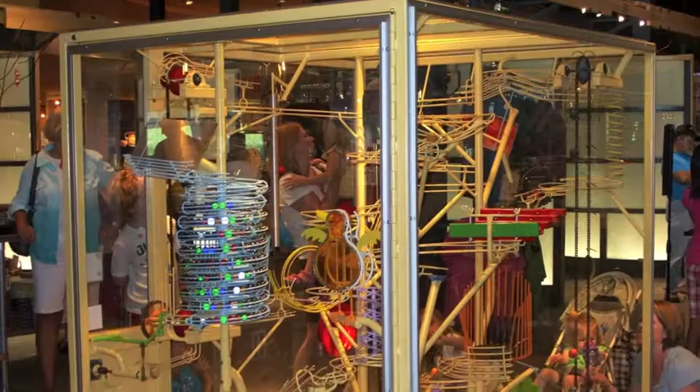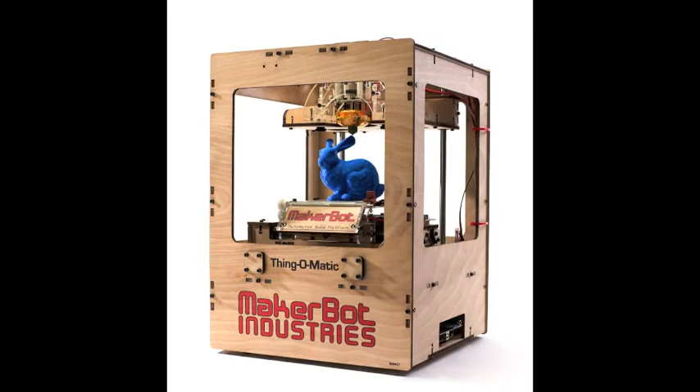I set out to design a kinetic sculpture, like the one seen here in the Corning Museum of Glass in upstate New York. I've always been mesmerized by these machines, and thought to myself, wouldn't it be cool to have one that could be 3D printed using a MakerBot Thing-O-Matic 3D printer?

This open source platform uses fused deposition modeling to lay down successive layers of ABS, a common thermoplastic used in everything from cell phone cases to Legos. The device builds up the desired part cross-section by cross-section, shown here in high speed.

While increased size increases the print time significantly, increased complexity, particularly in voids and holes, does not, and instead allows for less material to be expended, as 3D printing is an additive process as opposed to a subtractive manufacturing process that could employ the use of a CNC mill or lathe.

Through careful design and planning, I brought the idea to reality over the course of a few weeks using the computer-aided design and manufacturing tools at my disposal.

Starting first with concept sketches, I progressed to computer simulations using SolidWorks, a 3D modeling and analysis software package which I used to perform both motion analysis studies and finite element models to confirm my designs. I finally built a full working prototype with the Thing-O-Matic 3D printer detailed earlier.

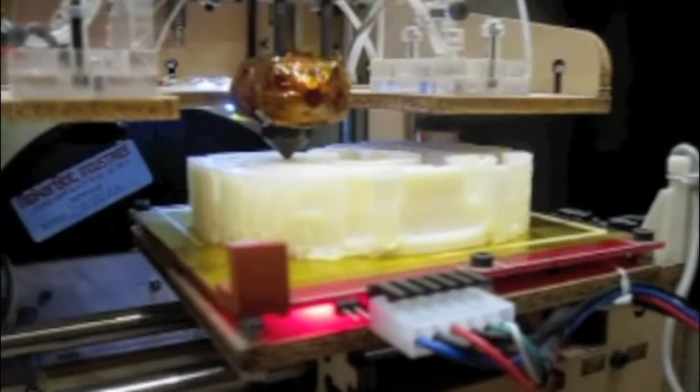I'll quickly go through some of the more interesting parts of the development of the machine, show some time-lapse photos of the 3D printing process, and then get to a demonstration of the device at the end.

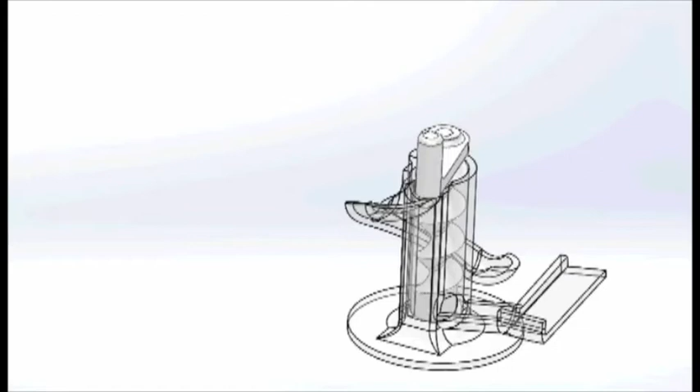One of the most useful tools in the development of this device was the motion analysis studies provided by SolidWorks. This study shows a flaw with my initial design, in which the ball would never escape from the helical lift.

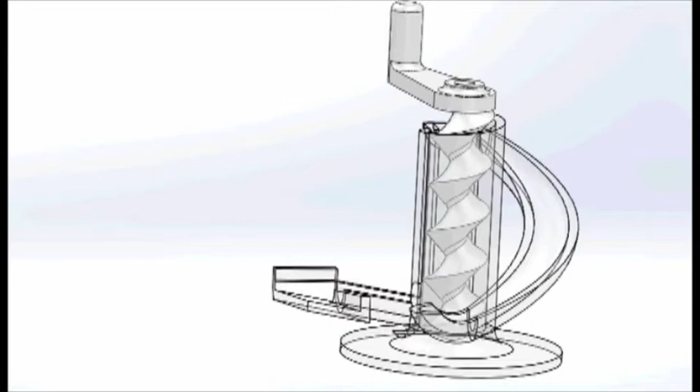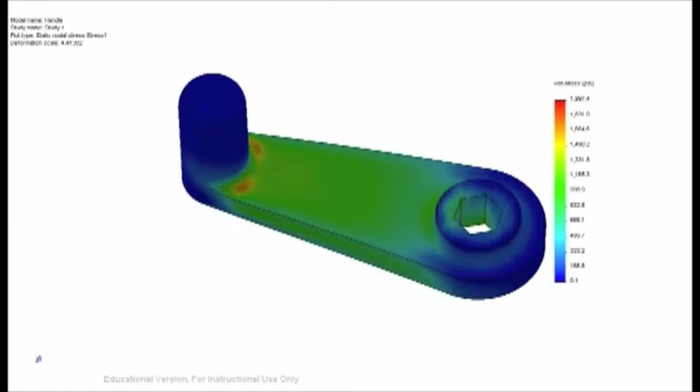These studies confirm that, in combination, the use of ABS and the geometry I specified would give a rigid design for the handle that would not yield during operation or moderate unnatural loading.

After the design was finished, it was time to print. This sequence of images illustrates the helical lift being 3D printed.

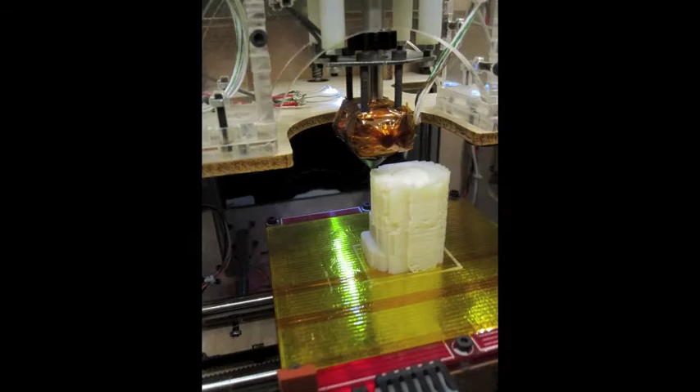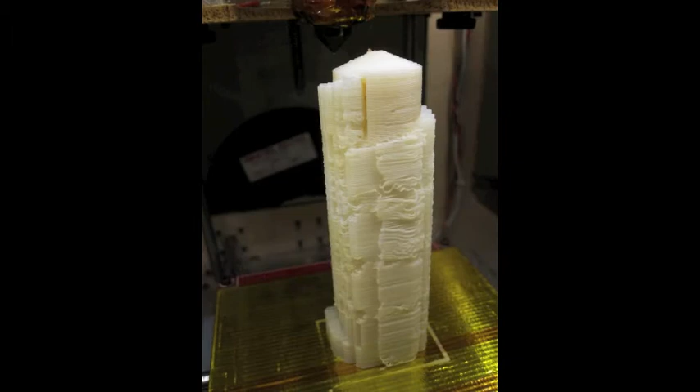After a print time of approximately 2 hours and 15 minutes, the support material needed to be removed. The part then emerged.

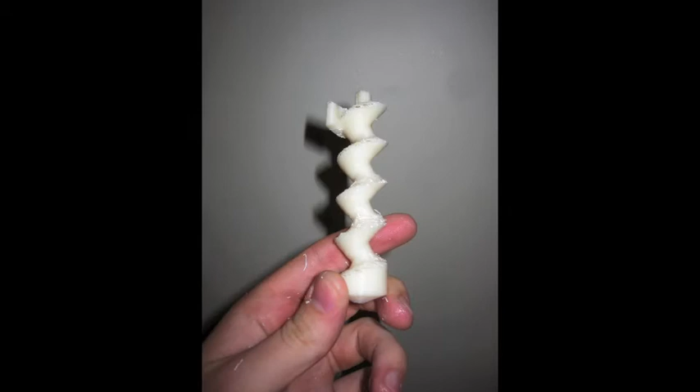Now, onto the base and track.

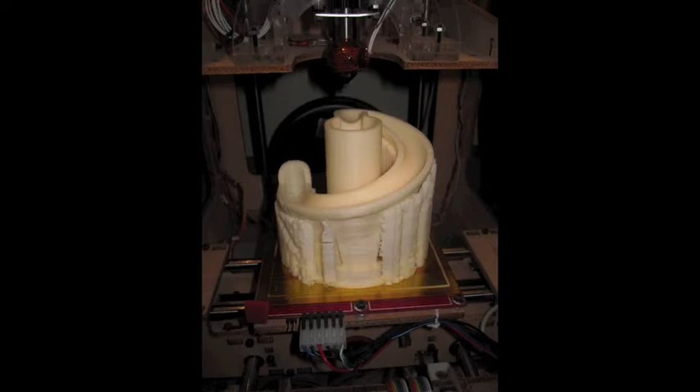Here, you can see the final result from the printing process, including the support material. This print, along with the handle that is not shown, took over 16 hours to complete.

Now, the final product. Here is the device fully assembled. Let's make it move.

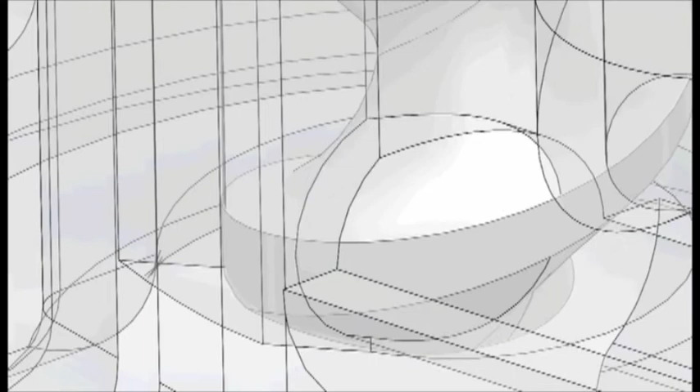Seen at the bottom, this feeder track aligns the ball bearings for insertion into the lift. Gravity pulls the ball bearings into the cutout, and a few turns of the hand crank brings the ball to the top.

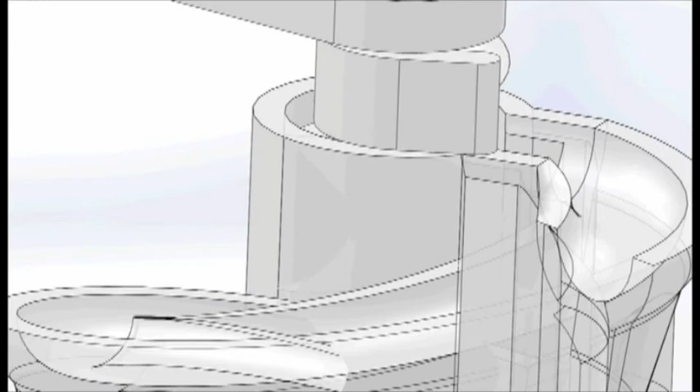To solve the problem found at the top of the lift, a small arm was attached to the helix. As the user rotates the handle, the small arm sweeps around and gently pushes the ball away. The ball rolls down and falls back into the feeder track to be brought back to the top again.

Let's look at it once in simulation.

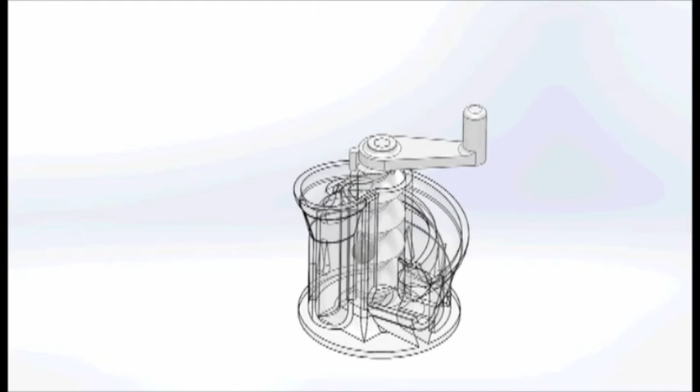Great, and let's check how the prototype works.

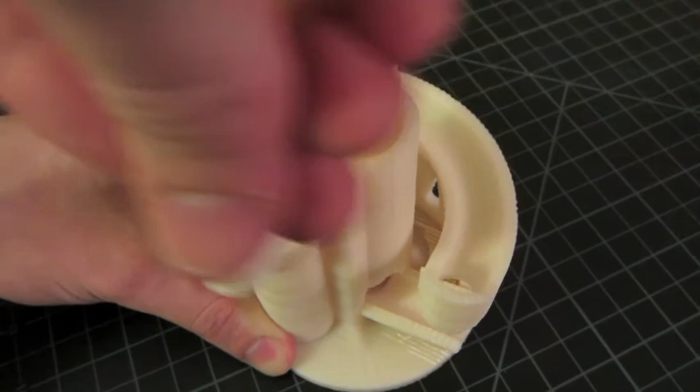Success! All of the hard work in simulating and running analysis has paid off.